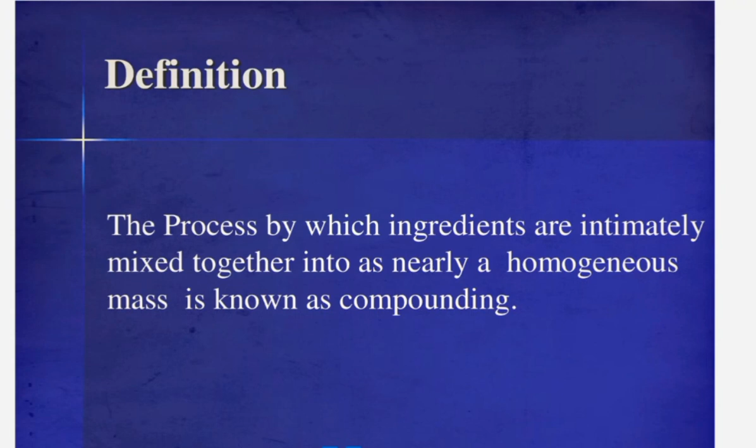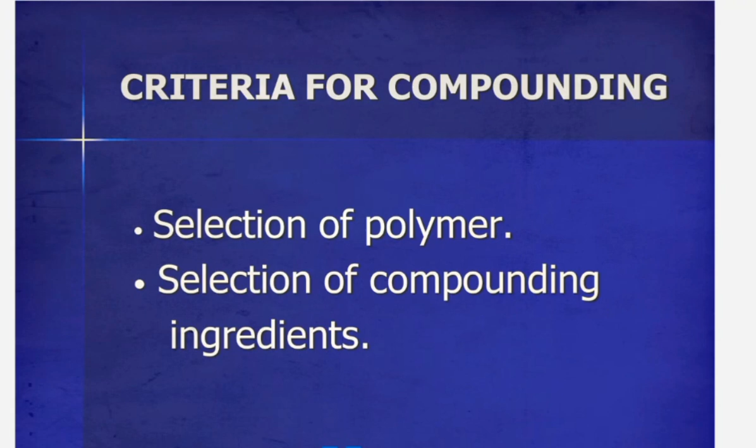Compounding is defined as the process by which ingredients are intimately mixed together into as nearly a homogeneous mass as possible.

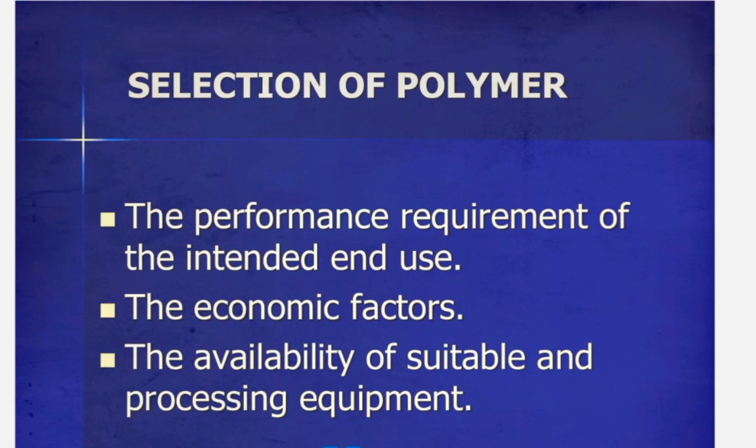Criteria for compounding include selection of polymer based on the performance requirement of the intended end use, economic factors, and the availability of suitable processing equipment.

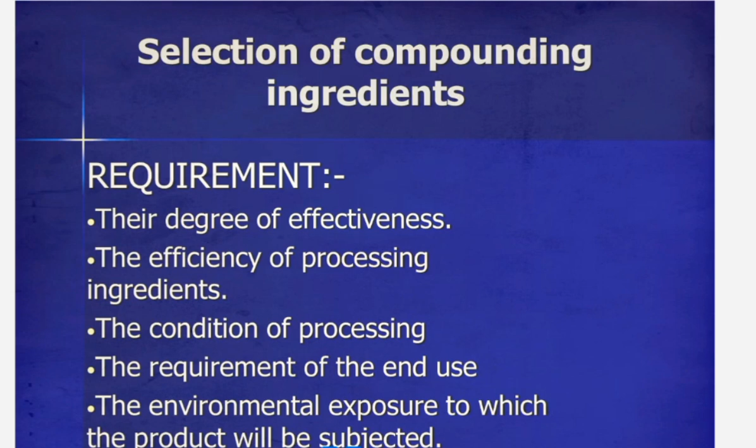Selection of compounding ingredients requires consideration of their degree of effectiveness, efficiency of processing, conditions of processing, requirements of the end use, and the environmental exposure to which the product will be subjected.

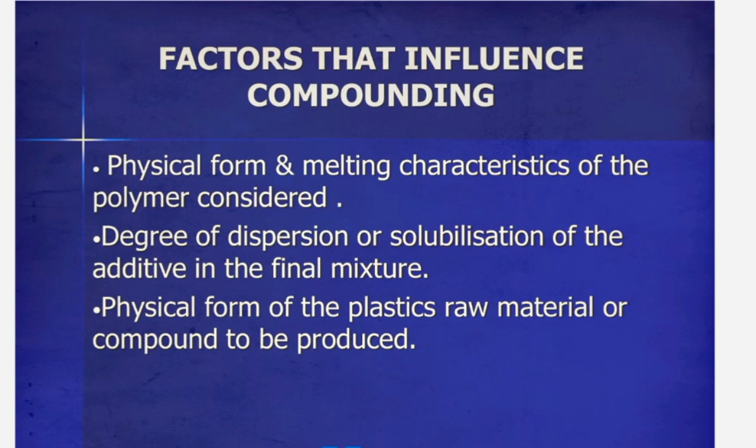Factors that influence compounding include the physical form and melting characteristics of the polymer, the degree of dispersion or solubilization of the additive in the final mixture, and the physical form of the plastic raw material or compound to be produced.

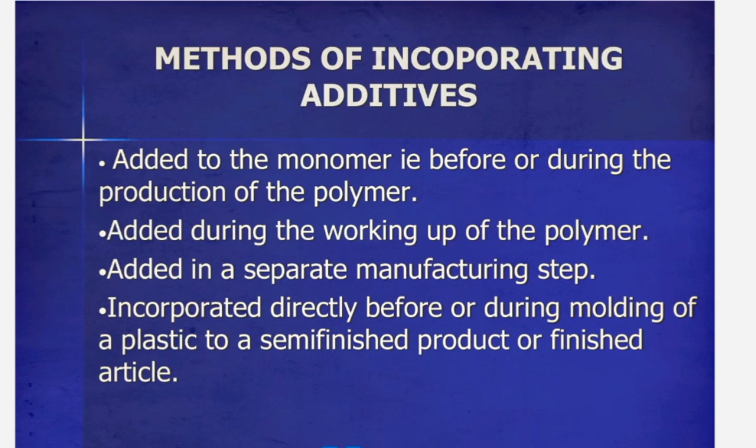Methods of incorporating additives: added to the monomer before or during production of the polymer, added during the working up of the polymer, added in a separate manufacturing step, or incorporated directly before or during molding of a plastic into a semi-finished product or finished article.

Addition of additives before or during the polymerization process: additives should be inert and are used by the producer of the base resins. Example: stabilization of impact-resistant PS and pre-stabilization of PVC produced by suspension polymerization. In both cases, antioxidants are added to the monomers.

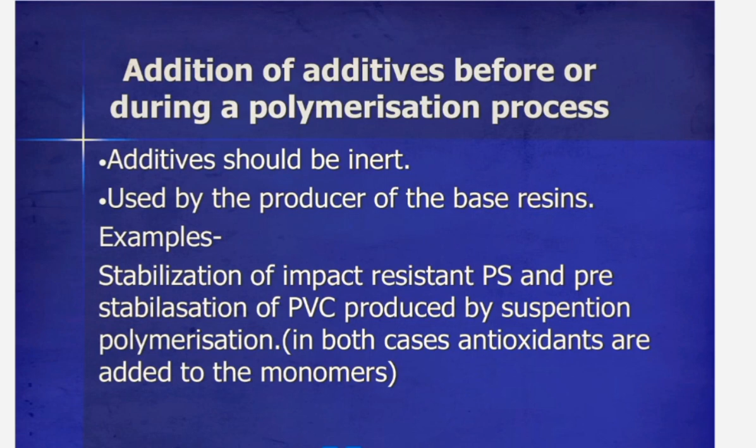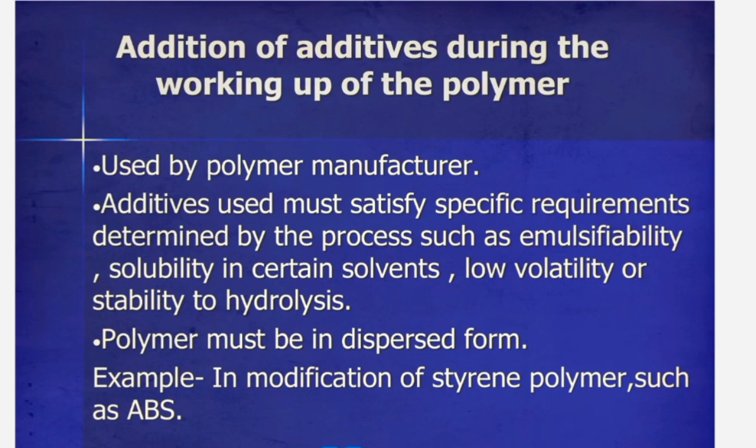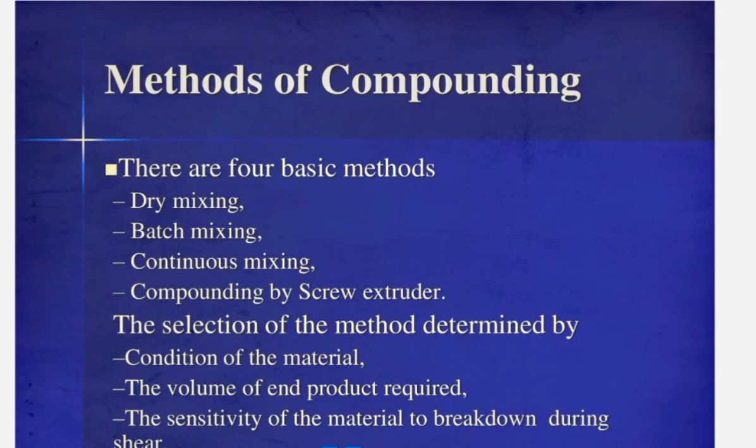There are four basic methods of compounding: dry mixing, batch mixing, continuous mixing, and compounding by screw extruder. The selection of method is determined by the condition of the material, the volume of end product required, and the sensitivity of the material to breakdown during shear.

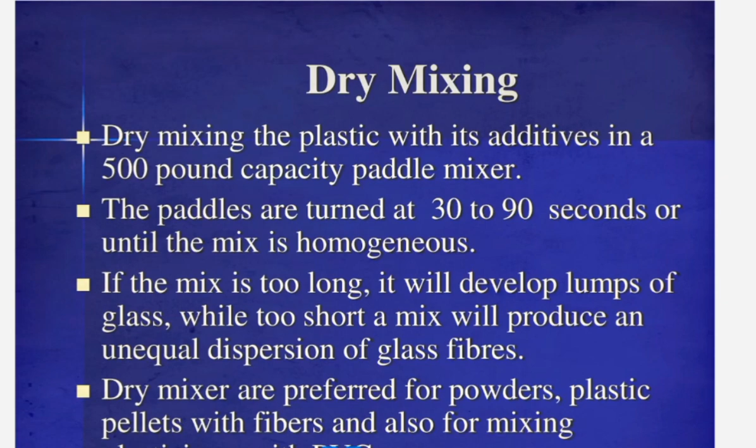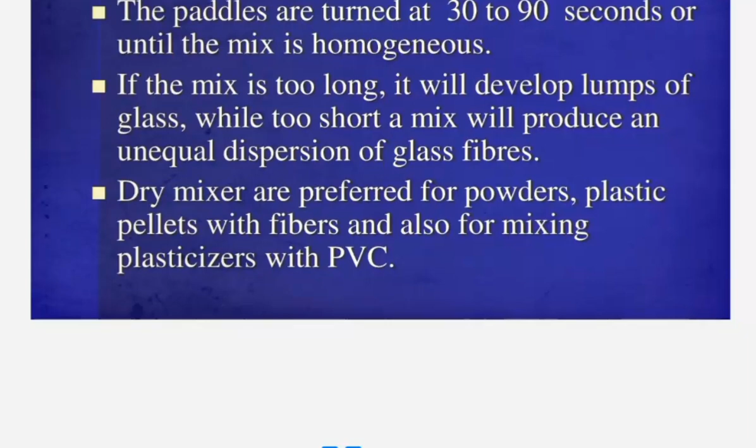In dry mixing, the plastic with its additives is placed in a 500-pound capacity paddle mixer. The paddles are turned for 30 to 90 seconds, or until the mix is homogeneous. If the mix is too long, it will develop lumps of glass, while too short a mix will produce unequal dispersion of glass fibers. Dry mixers are preferred for powders, plastic pellets with fibers, and for mixing plasticizers with PVC.

There are four types of dry mixers: high-speed impellers, ribbon mixers, paddle mixers, and drum tumblers.

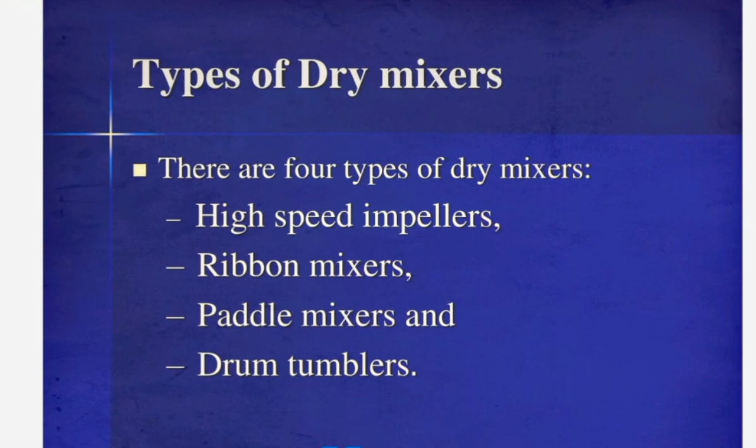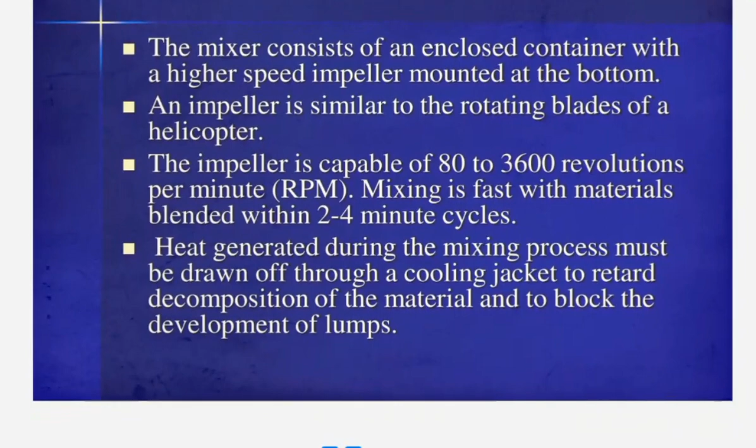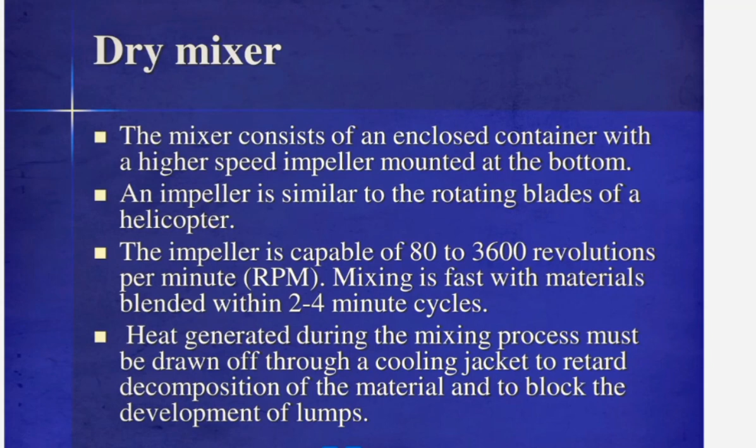A dry mixer consists of an enclosed container with a high-speed impeller mounted at the bottom, similar to the rotating blades of a helicopter. The impeller is capable of 80 to 3,600 revolutions per minute. Mixing is fast, with materials blended within 2 to 4 minute cycles. Heat generated during mixing must be drawn off through a cooling jacket to retard decomposition of the material and block the development of lumps.

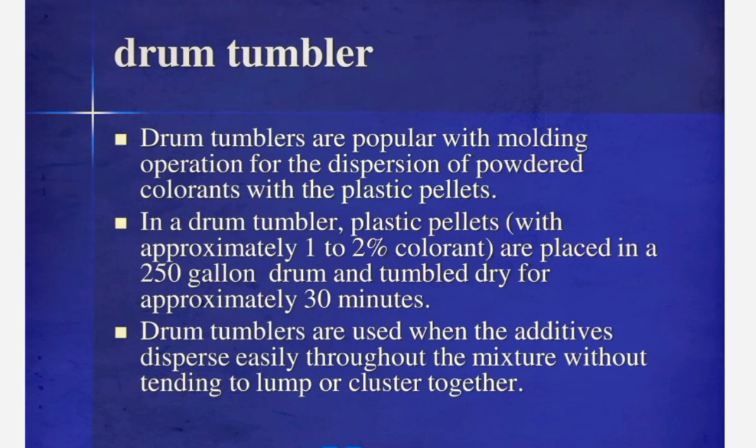Drum tumblers are popular with molding operations for dispersing powdered colorants with plastic pellets. In a drum tumbler, plastic pellets with approximately 1 to 2% colorant are placed in a 250-gallon drum and tumbled dry for approximately 30 minutes. Drum tumblers are used when additives disperse easily throughout the mixture without tending to lump or cluster together.